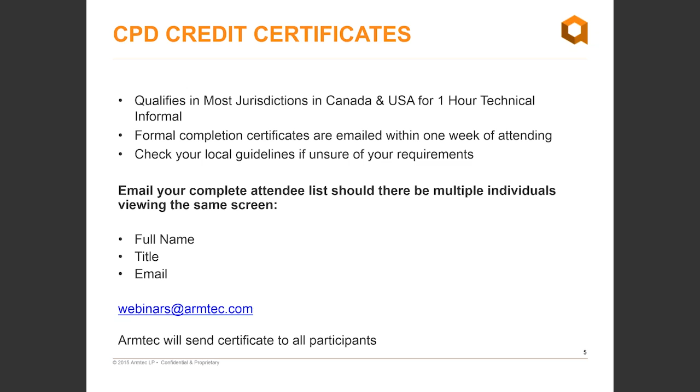I'd like to start off with a brief introduction to Armtec. We are one of Canada's oldest and largest infrastructure companies, supplying solutions ranging from steel and HDPE-based bridge and culvert materials to precast building systems.

With locations across the country, we are well positioned to serve your needs wherever you are. We also have an international sales group to support you with project locations around the world.

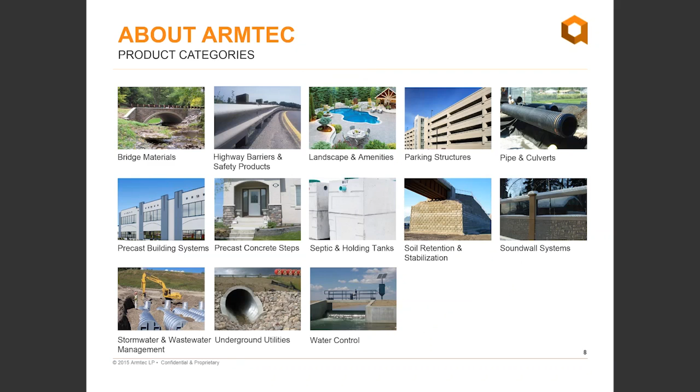As you can see, Armtec offers products in a wide range of categories, including precast products such as building systems, parking structures, and sound wall systems. On the drainage side of the business, we offer pipe and culverts, engineered steel bridge solutions, and, related to today's presentation, stormwater management systems and much more.

We serve numerous sectors from municipal to forestry and mining and energy. More about how we service these sectors can be viewed on our newly revamped website or through discussion with one of our experienced sales representatives.

With our centralized engineering department and regional engineers, Armtec has the exceptional capability to fully support design and challenging engineered project requirements. Our company also has the expertise to take your project through all phases of the design and construction process with the design, build, delivery method.

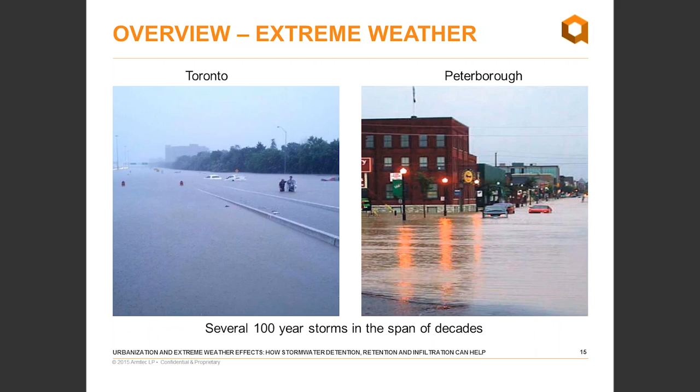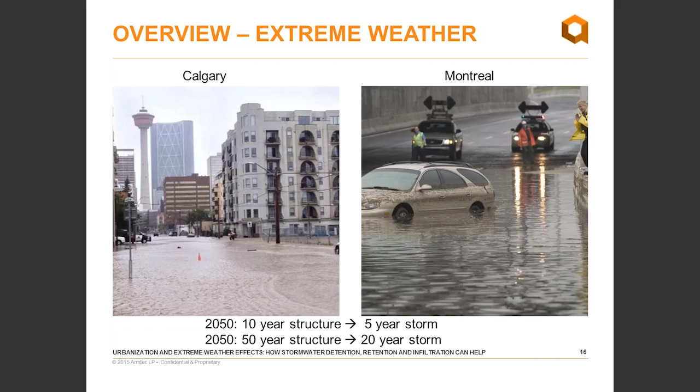As you may already know, we are witnessing an increase in the precipitation intensity and number of severe storms. In some regions of Canada, several 100-year storms have been witnessed within the span of decades. Multiple studies have also shown that by 2050, an actual 10-year drainage structure will only be able to withstand a 5-year storm. A 50-year drainage structure will only be able to handle a 20-year storm.

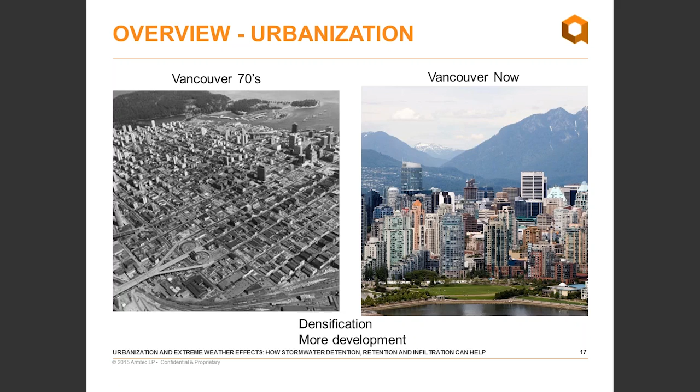At the same time, population needs for new land is also increasing. This is resulting in the densification of already saturated urban areas and expansion into new areas, especially in the suburbs. Impervious surfaces are popping up everywhere, reducing natural soil surfaces and thus eliminating rainwater infiltration and natural ground discharge.

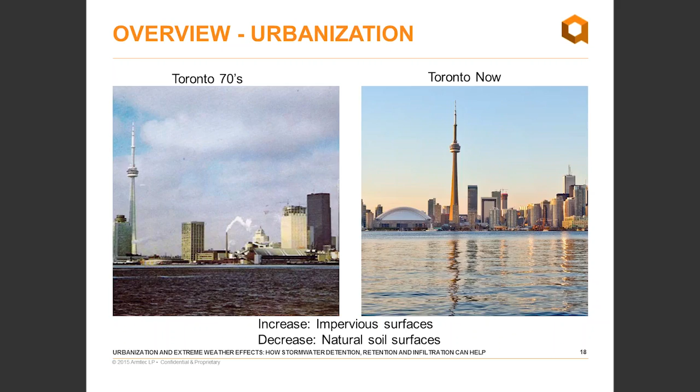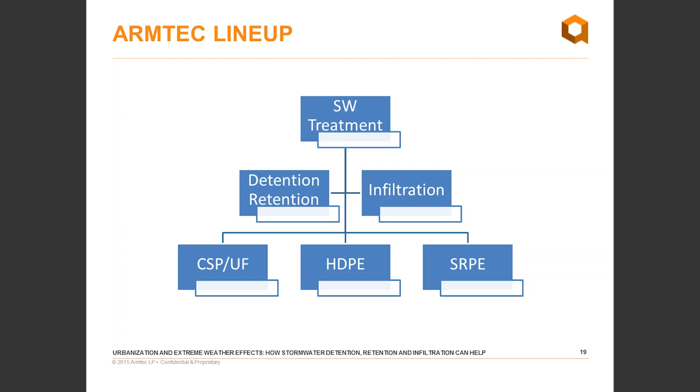At Armtec, we have assembled a line of products to tackle these issues. Similar to a good hockey team, we have identified a line of 3 forwards, another line of 2 defensemen, and a goalie. Our 3 forwards are CSP ULTRA-FLO, HDPE, and SRPE pipes. Our 2 defensemen are detention and retention tanks, and infiltration, and our goalie is the stormwater treatment.

Our first product is the Hel-Cor corrugated steel pipe, which is helically made with a lock seam. We have a wide range of diameters ranging from 150 to 3600 millimeters with different combinations of thicknesses, corrugation, and coatings. We also have custom lengths of 6 and 9 meters, and we can go up to 15 meters on custom-made lengths.

We can also offer different lengths. If you need, for example, 6.5, 7, 9, or 8 meters, we can accommodate that. This pipe is certified and manufactured according to CSA G401.

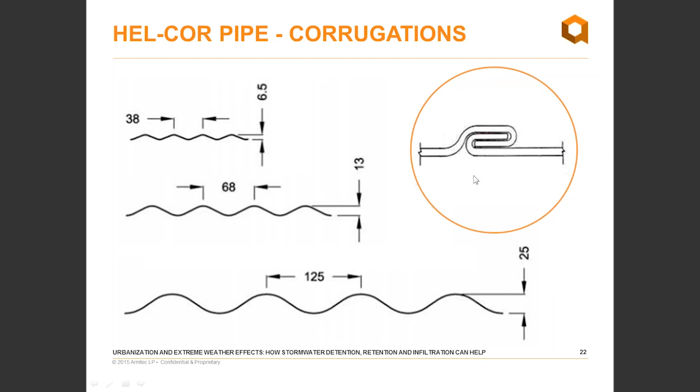We also have the cousin for the Hel-Cor pipe, which is the ULTRA-FLO. The difference between the ULTRA-FLO and the Hel-Cor is the Manning coefficient. We have practically a smooth interior for the ULTRA-FLO with a Manning of 0.013.

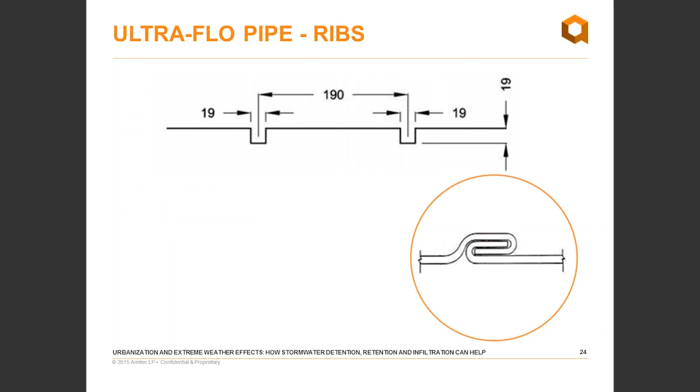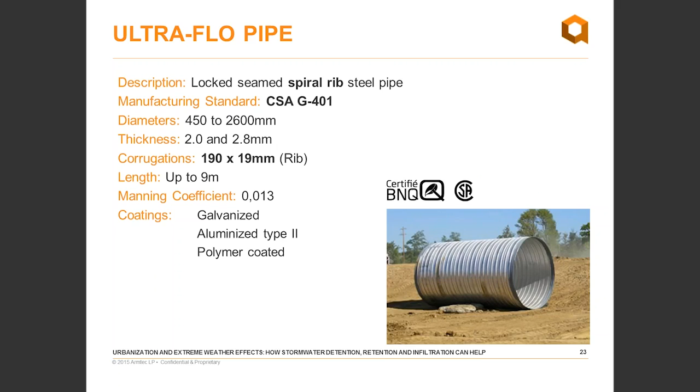It has the same coating. You can offer them with the same coating as the regular Hel-Cor pipe. The structural part of the pipe is handled by a rib of 19 millimeters by 19 millimeters that you can see here, spanning every 190 millimeters. We have a variety of diameters going up to 2600 and 2 different thicknesses, 2.0 and 2.8 millimeters.

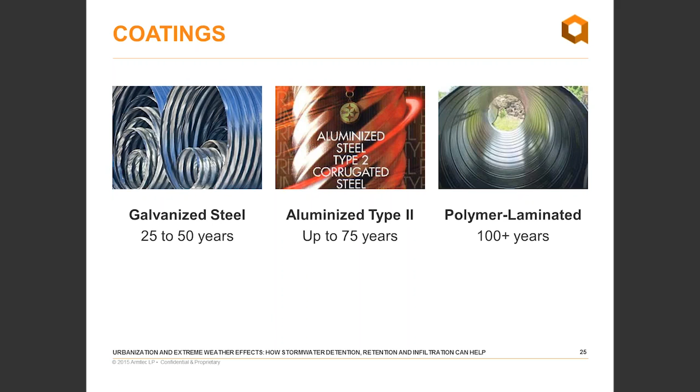As seen before, we have 3 different coatings for those 2 types of pipes. We have galvanized steel with an estimated service life between 25 and 50 years. We have aluminized type 2 steel which can offer a service life up to 75 years, and a polymer-laminated steel which can go up to 100 years and more. Our polymer-laminated product is also known commercially as TRENCHCOAT, combining the strength of steel with the durability of plastic.

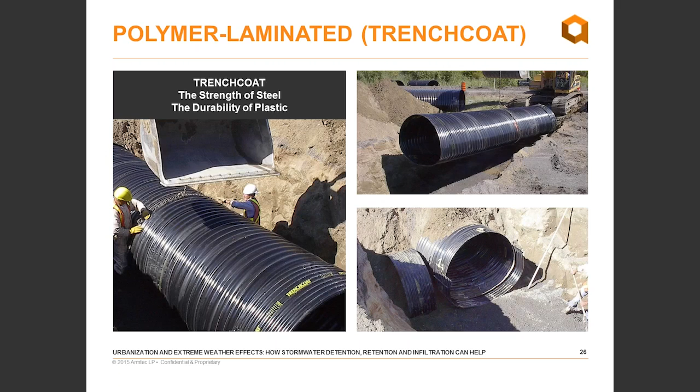Aluminized will perform best between 5 and 9. Polymer laminated between 3 and 12. Resistivity-wise, galvanized is good between 2,000 and 8,000. Aluminized is good at 1,500 and more. Resistivity is not an issue for the polymer.

Hardness-wise, any concentration above 75 ppm is good for galvanized. It's not a factor for aluminized. It's not a factor for polymer. The hardness effect is very important for the galvanized steel.

In some parts of the country, we have installed galvanized pipes which have more than 75 years of actual service, and they are still in good condition.

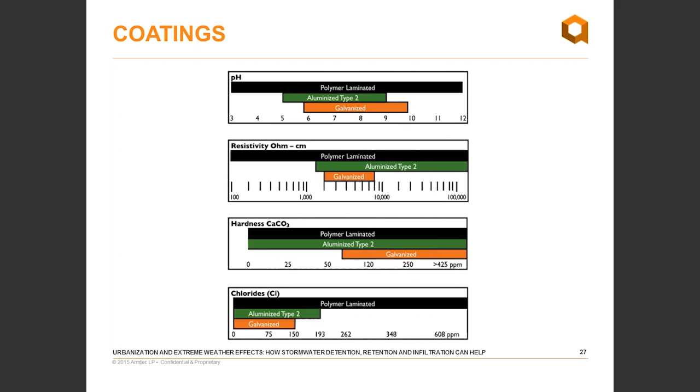Enemy number one of galvanized and aluminized steel is chloride, which is the salt we use on the road. Any concentration above 150 ppm for galvanized or 190 for aluminized is very bad. It's not a factor for polymer laminated.

With those two kinds of products, Hel-Cor and ULTRA-FLO, we offer a wide range of fittings. Could be Ys, could be Ts, could be inlets, outlets, we can offer risers, we can offer adapters, any kind of adapter, anything you can imagine, anything you can draw, we're able to manufacture. All of this is done at our factories located across the country.

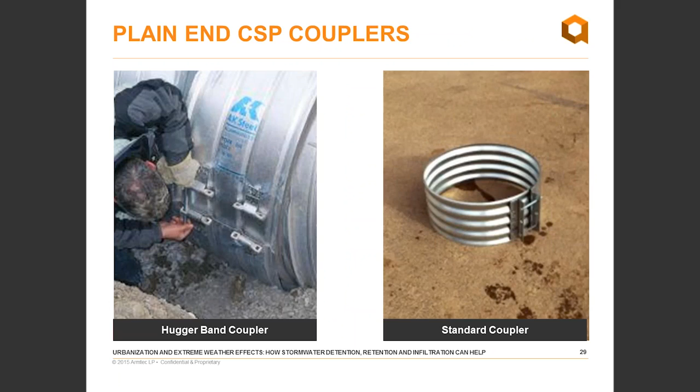For those two pipes, we also offer two kinds of couplers. The first one is a soil-tight kind of coupler, which is a standard coupler. And for a watertight application, we use the Hugger Band.

Our second product is the high-density polyethylene corrugated pipe, which is basically made from virgin and recycled resin. We add to it some carbon black, minimum 2%, to protect against ultraviolet radiation.

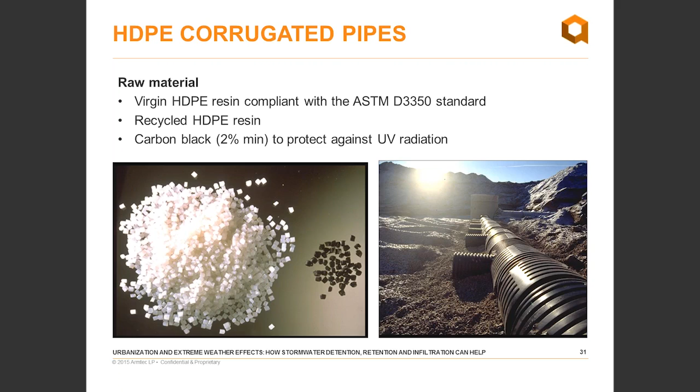The BOSS 2000 range of products is a pipe which has a smooth interior with a corrugated outside wall. It's made in diameters up to 900 millimeters, with a standard length of 6 meters. We also offer different custom lengths that can go up to 15 meters.

We offer two ranges of stiffnesses, which basically gives the structural integrity of the pipe. We have 210 and 320 kPa. We offer them both in solid or perforated. For the perforated one, we can offer an additional filter or geotextile sock, any kind of geotextile based on site conditions the pipe can be fitted with.

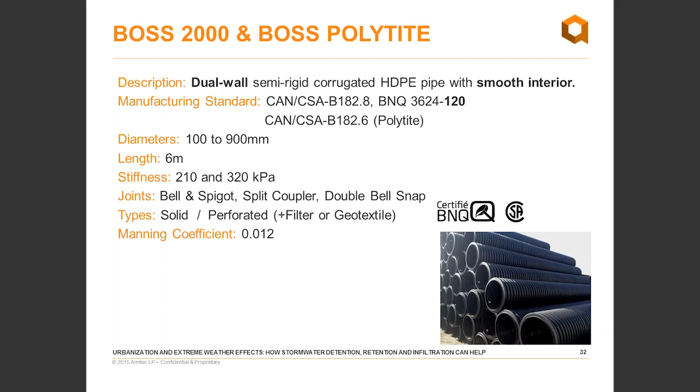This is a smooth interior pipe, so the Manning coefficient is very low, up to 0.012.

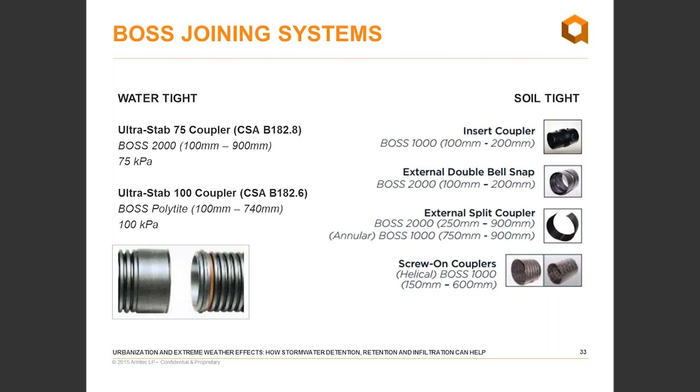We have a wide variety of joining systems for the BOSS 2000. We have soil-tight, different kinds of couplers, and we have watertight ones with bell and gasket. We also offer a manholes coupler for special applications.

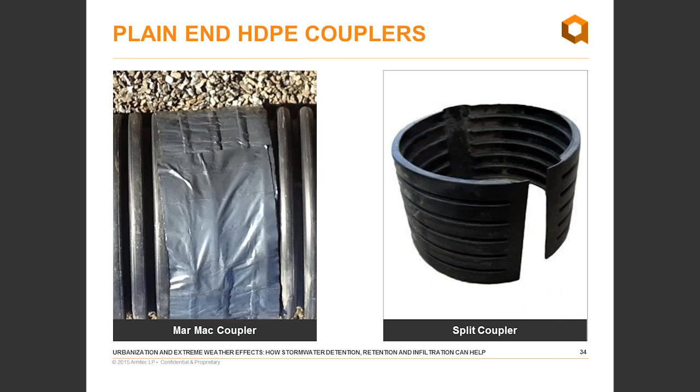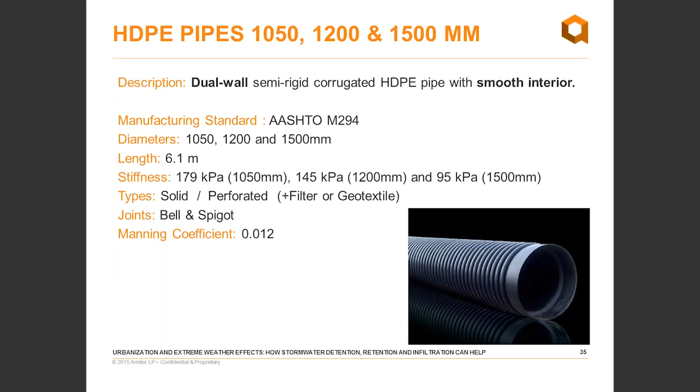The second range of HDPE pipe for higher diameters is similar to the other one, except for the stiffness. The stiffness will vary and go down with the pipe diameter. So basically, a 1050 will be 179 kPa, and a 1500 will be 95 kPa. It's a standard length of 6.1 meters, and the joint is a bell and spigot, the same manning as previously talked about.

As with the CSP pipe, we offer a wide range of fittings. They can range from elbows, T's, Y's, reducers, any kind of fitting you can imagine, manhole adapters, couplings, risers, whatever you can think of, we can have it.

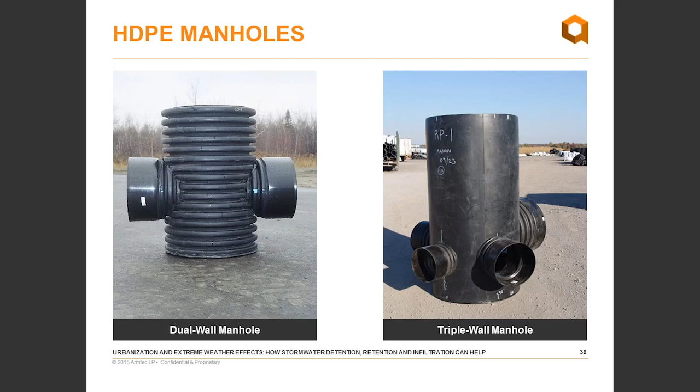With the HDPE, we can also offer dual wall manholes and triple wall manholes. The difference with the triple wall manhole is we add a third layer to make it a smooth wall exterior for the manholes. As you can see, we can adapt, we can add multiple inlets and outlets with different diameters to those manholes.

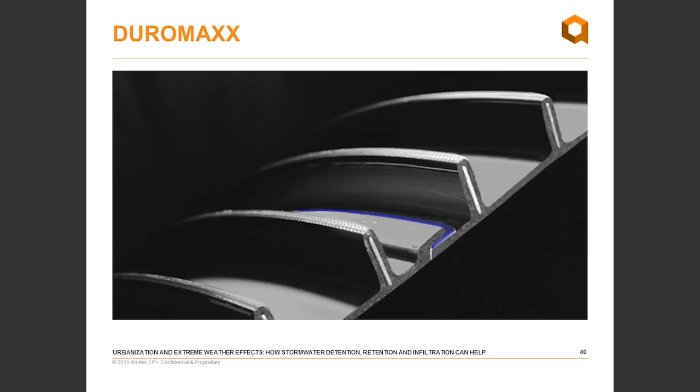This kind of steel reinforcement will enable the DUROMAXX pipe to have bigger diameters, so we can go up to 3,000 millimeters, and it will also increase the strength of the pipe, so it will withstand higher covers and higher live loading. We offer them with typical lengths of 4.3 and 7.3 meters as a standard, and we can go up to 15 meter long custom ones.

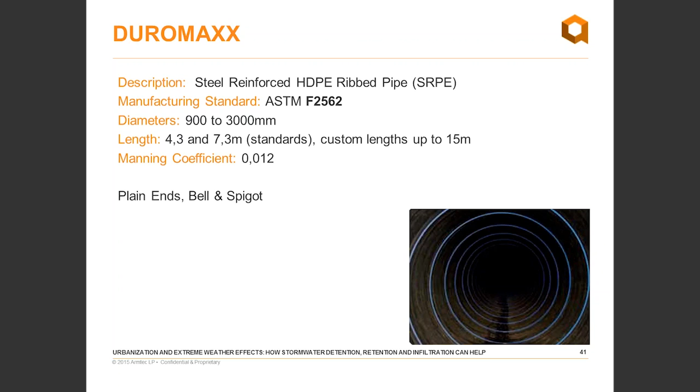We offer different joining systems depending on the site conditions. We can offer soil tight culvert joint. We can offer a non-reinforced bell and spigot, which gives us a water tightness up to 3 psi. If you need more water tightness up to 15 psi, we can add a reinforcement to the bell. Additional water tightness up to 35 psi could be achieved with ELECTROFUSION.

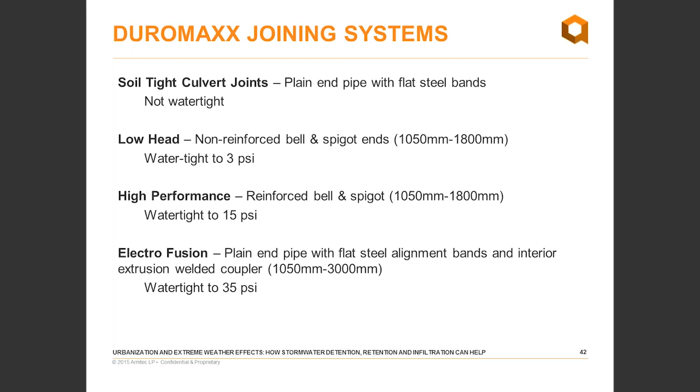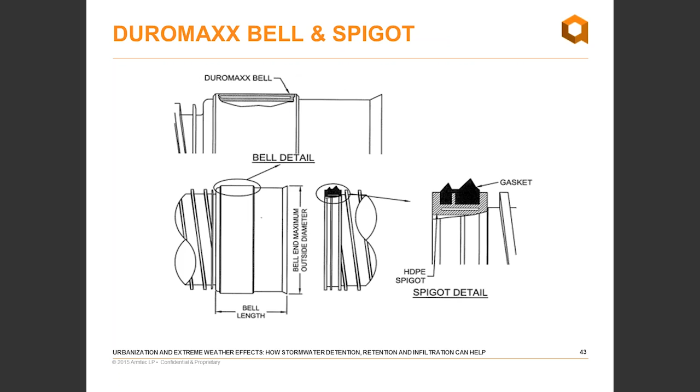This is an example of the reinforced bell. As you can see, there is an encapsulated steel plate inside the bell, which will give it additional rigidity and increase its water tightness compared to a regular non-reinforced HDPE bell.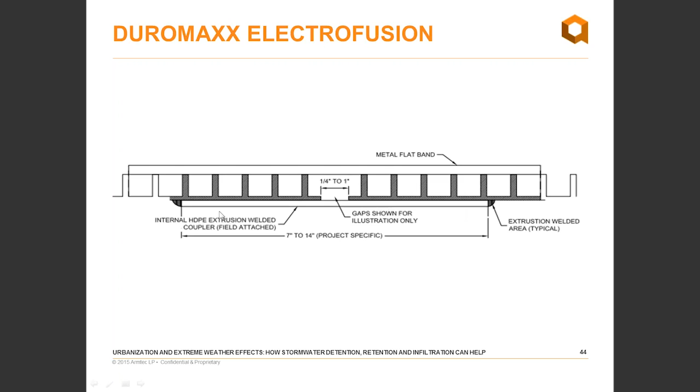For additional water tightness, this is the detail for the ELECTROFUSION. As you can see, there is an outside metal flat band to help during the installation. All the water tightness is achieved through the ELECTROFUSION from the inside of the pipe, made as soon as the pipe has been installed.

What we will do is mimic the actual conditions before development of the land. So basically, the water will go inside and then dissipate inside the land and go down as it would usually do without the new development.

Some design and construction considerations: usually, hydrology and hydraulics are handled by the consultant. He will get back to us with his storage requirement, and we will ask him about the footprint he has on site. We will handle the structural design, propose a layout, and give him guidelines on installation, maintenance, inspection, and cleaning of each detention or retention tank.

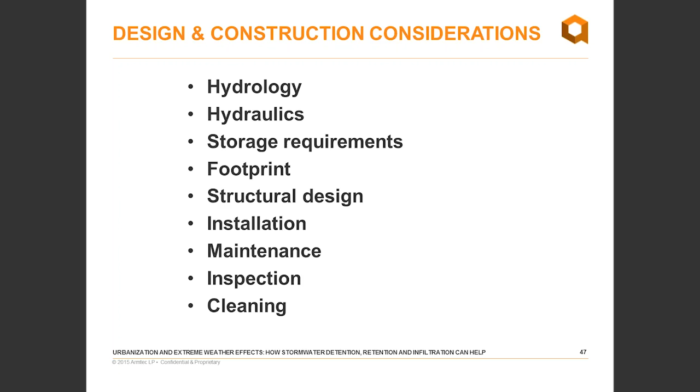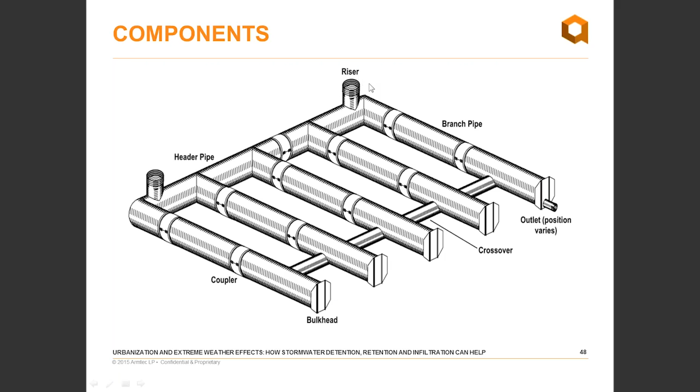Basic components of a typical retention or detention tank: we have the branch pipe, which is made by a regular pipe, and the header pipe, which assumes the flow inside those branch pipes. We also have bulkheads, outlets, couplers, and crossovers to connect the different branches. Finally, we have risers, which will enable us to do maintenance, cleaning, or inspection.

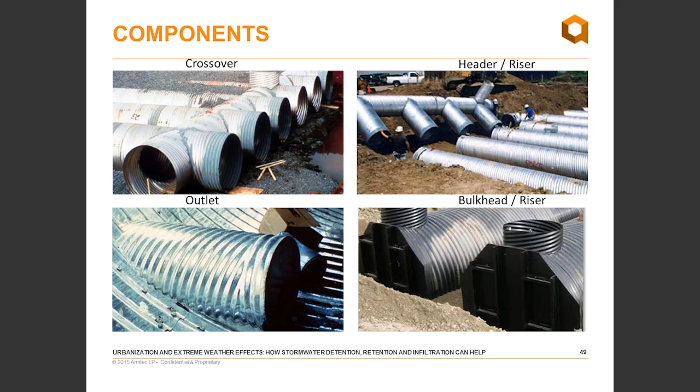This is some examples of those components. We have here the headers with integrated riser. We have a bulkhead with integrated riser, a crossover, and the outlet. The outlet can be put anywhere. We have the possibility also to include inlets or outlets anywhere inside that system.

One of the advantages of the detention-retention tank is versatility. Depending on the footprint you have on site, we are able to make any kind of layout to fit what you have on site. So this is one example.

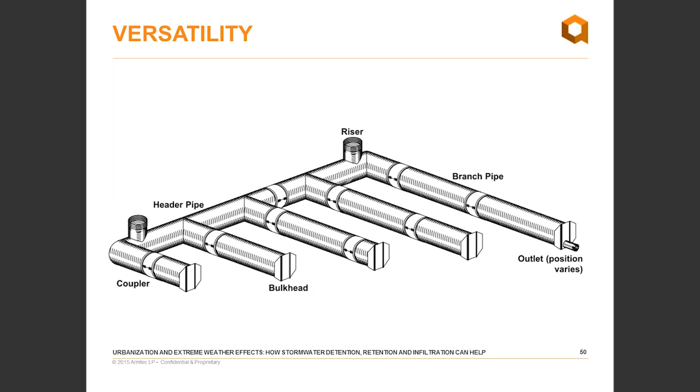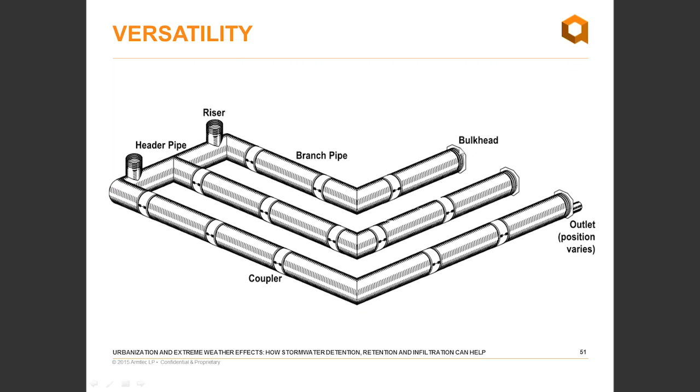We can also have different kinds of applications. We can integrate elbows inside our detention tanks. As you can see, we still have all the regular components: bulkhead, risers, headers, outlets. This is a different combination also.

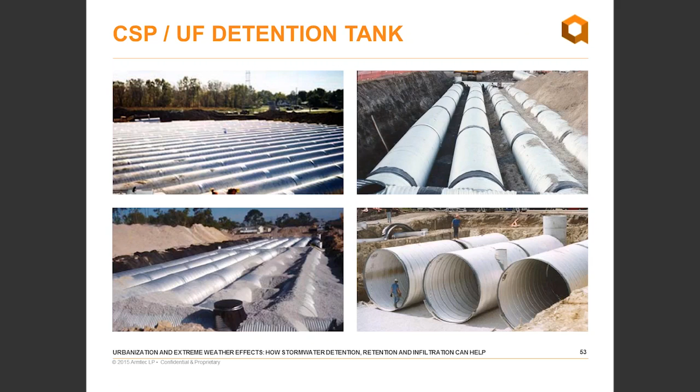Here are some examples of CSP Ultra Flo detention tank. As you can see, we can offer with CSP a wide range of diameters, small and big ones. You can see here the risers. The number of risers actually depends on the system; we recommend at least one riser per system, but we can make as many as an engineer wants on each system.

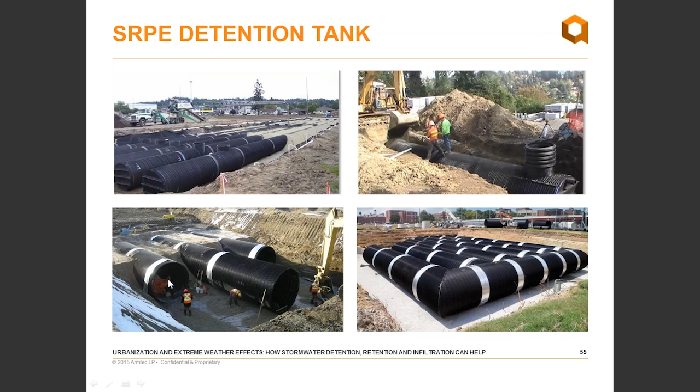Our last example of detention tank is the SRPE, which is the DUROMAXX. DUROMAXX can not only be used for stormwater, but also for non-stormwater applications, for example sanitary sewers or combined sewers. Here at the bottom left side is a combined sewer example. You can see the metal band on the outside part of the pipe. After the system has been installed, a team entered and did the electrofusion inside that system.

We at Armtec offer a design tool. This design tool is very simple; it's an Excel sheet where you add the wanted volume you need to detain. You add some basic information about the dimensions or the elevation. You also choose the pipe size, and you choose if you want it as a detention or a retention system.

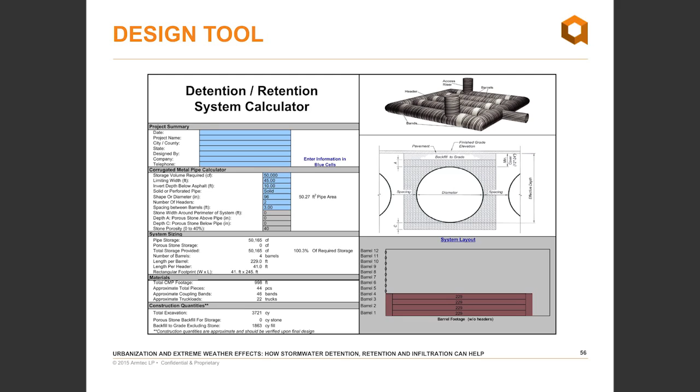If it is a retention system, you can add some data about the distance between the pipes, the height of washed stone to use, and the porosity of the washed stone. The Excel sheet will give you back the total volume the pipe is going to hold, the total volume the wash stone will hold, a preview of the layout, the quantity of all the branches, couplers, headers, risers, total quantities of trucks needed, and also an approximate idea of the total excavation and total wash stone quantities needed for that site.

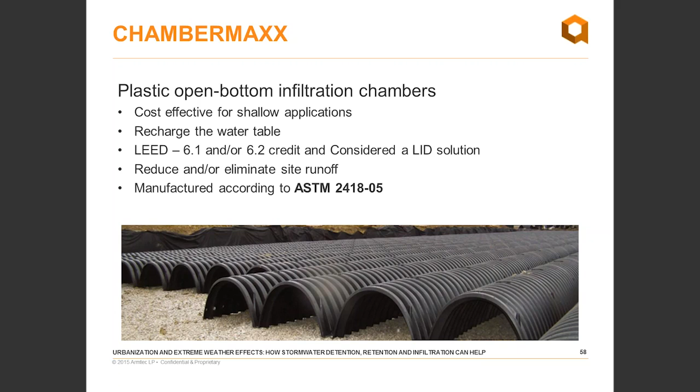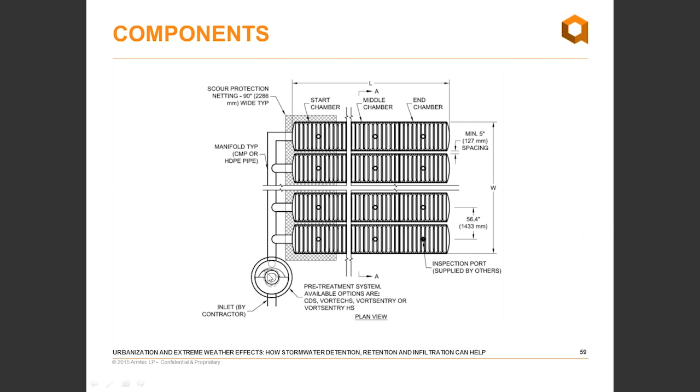Basic components of CHAMBERMAXX include a start chamber, a middle chamber, and an end chamber. We also have an inspection port, a scour netting, and a header type or manifold. We recommend also having a pre-treatment system before the CHAMBERMAXX. This is a 3D view of the same components. One advantage of CHAMBERMAXX is that the end chamber has an integrated end wall. This is the inspection port, this is the header manifold, and this is the pre-treatment system.

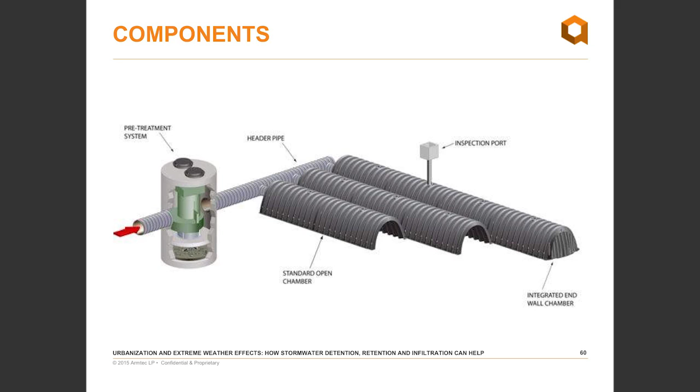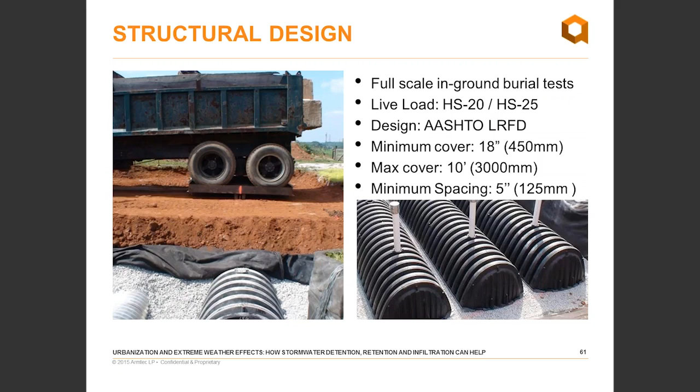The CHAMBERMAXX has withstood a full scale in-ground burial test with height of cover ranging from 450 millimeters to 3,000 millimeters and live loading of HS20, HS25. We recommend a minimum spacing of 125 millimeters. Standard dimension of a regular CHAMBERMAXX is a span of 1,300 millimeters and a rise of 770, with an average length of 2,100 millimeters. Including the surrounding stone, a CHAMBERMAXX is able to take approximately 1 cubic meter per linear meter of CHAMBERMAXX.

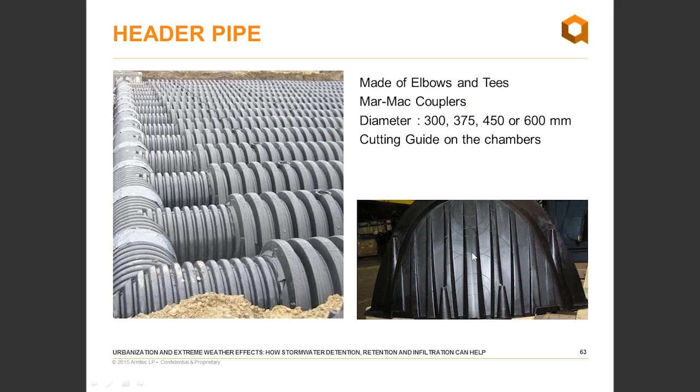This is a detail of the header pipe, usually made of elbows and T's and connected to each other with the Mar-Mac type of couplers. We have a wide variety of diameters available, 300 to 600 millimeters, and usually you would connect it to the CHAMBERMAXX using the cutting guide, as you can see here on the wall end of the chamber.

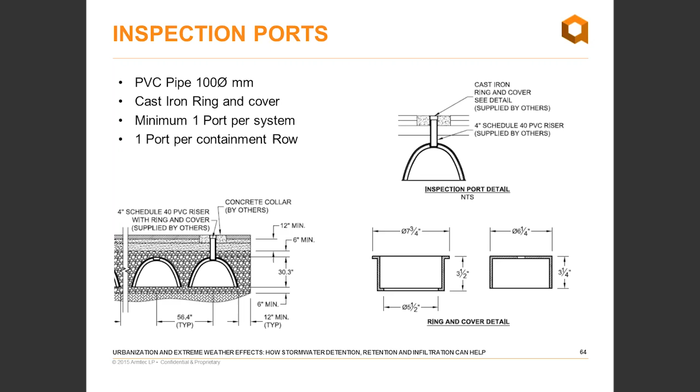We also have the inspection port. The inspection port is basically a 100 millimeter PVC pipe with a cast iron ring and cover. We usually recommend at least one port per system and one port per containment row. We also recommend pre-treating the water before it enters the system to help reduce the quantity of sediment, increase the efficiency of the system, and reduce the maintenance cycle needed for the CHAMBERMAXX.

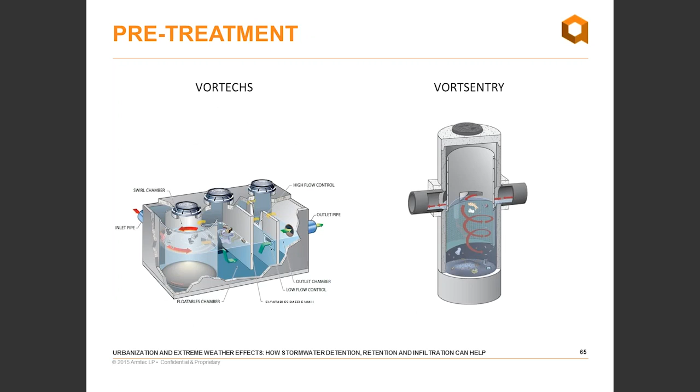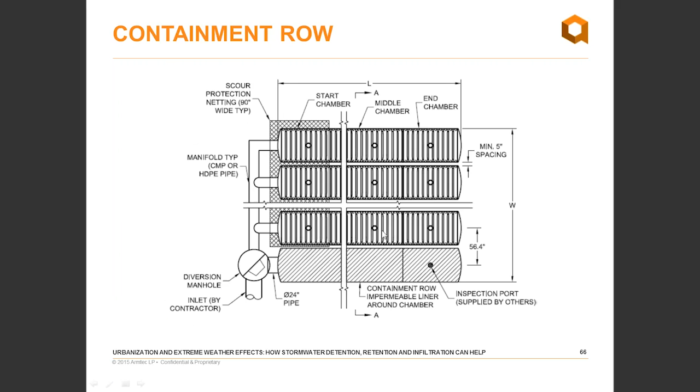Instead of using a pre-treatment system, we can also use a containment row. Basically, the containment row is a regular CHAMBERMAXX row wrapped all over with an impermeable membrane. When we want to do maintenance on a containment row, all the sediments will be trapped inside the chamber, and we have a back kind of washout that brings the sediment from the back end of the unit to the inlet manhole at the beginning of the system.

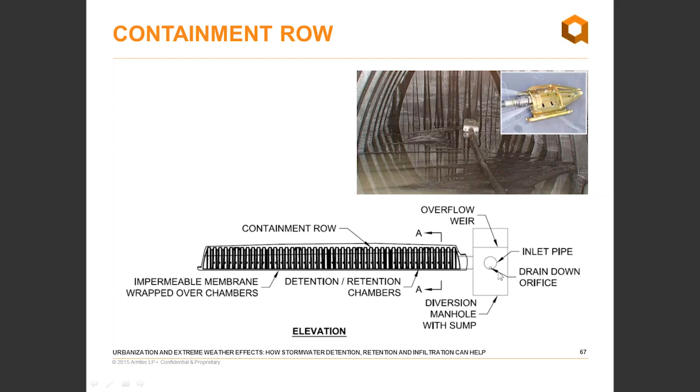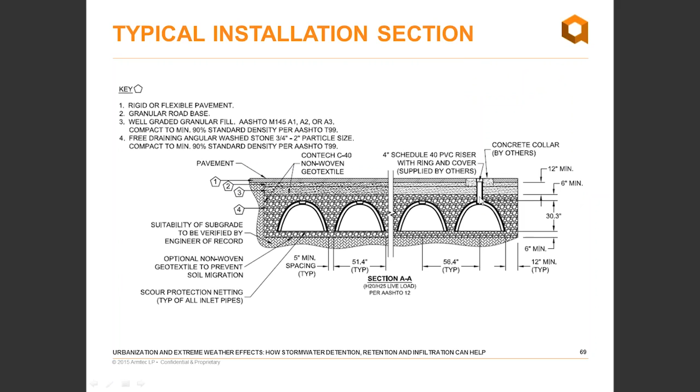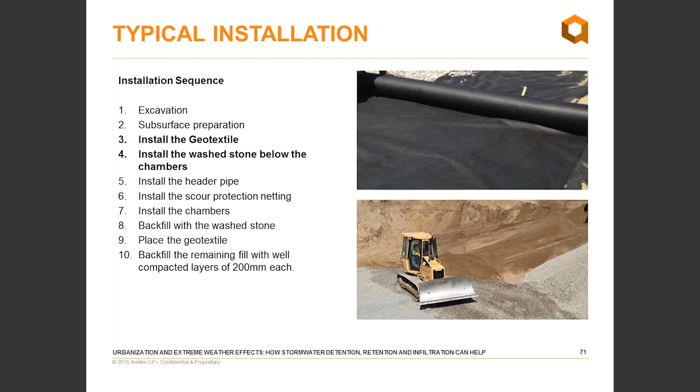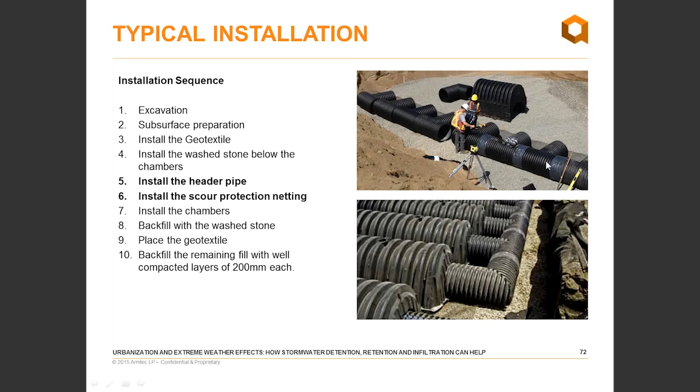The sequence of installation: we start by excavating until the required elevation, then we prepare the subsurface. We lay over the first layer of geotextile between the existing soil and before adding the washed stone on it, the first layer of washed stone underneath the CHAMBERMAXX. We install the scour protection netting and the header pipe, then we connect them to the chambers and install the remaining chambers.

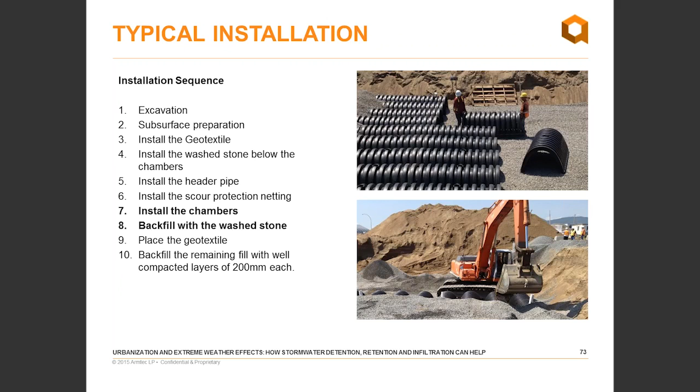As soon as we finish, we backfill with the washed stone to the required level. We place the geotextile to protect the washed stone, and then we place the remaining backfill as requested until the pavement level.

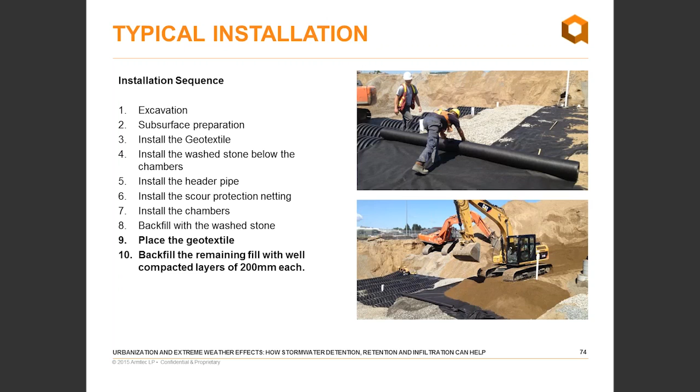Manufacturing-wise, it's a very simple process. The CHAMBERMAXX is an injection molded polypropylene product with superior resin, structurally and in quality. One of its advantages is the integrated end walls that will prevent the loss of soil from the top, if a non-integrated wall would break down from the regular end unit.

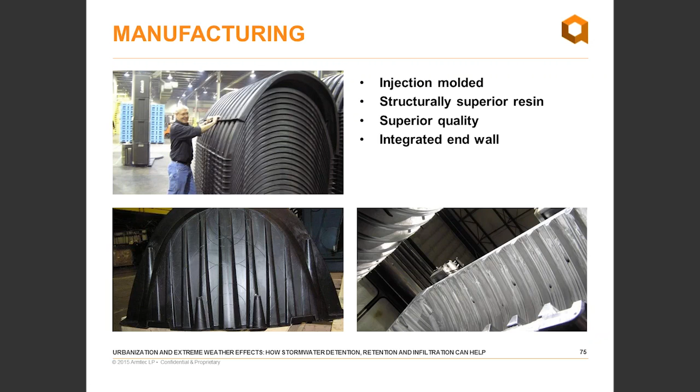As per the detention system, we have a design tool which is available as an Excel sheet. It's also very similar for the retention system. Basically, you input the required volume, the depth of the invert, the limiting width.

If you want to use the porous stone, you input the thicknesses or depths below and above the system, and the density or porosity of the stone.

The system will automatically generate a preview of the layout. It will also give you the number of chambers, the total volume, the volume from the chambers itself and the volume from the porous stone, as well as an approximate rectangular footprint.

We will also have a detail of the number of middle units, start units, end units, the manifold, the header unit. We will also give you a quantity of the scour netting, the geotextile used, the number of trucks needed, as well as the total excavation volume, stone backfill volume, and the remaining backfill to grade.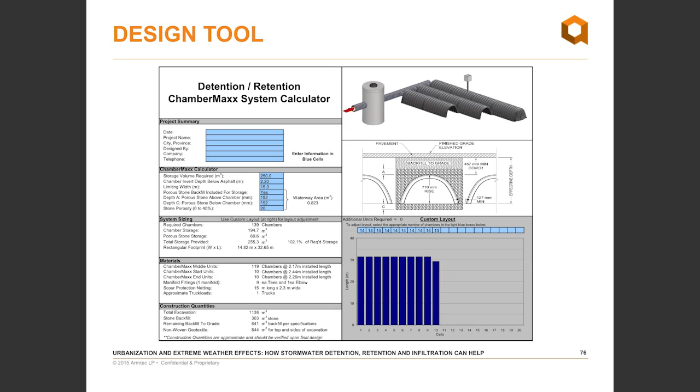Hello, everyone. Today I'm going to talk about our stormwater treatment unit, VORTECHS, which is Armtec's flagship stormwater treatment offering. It's a shallow profile, high flow, hydrodynamic separator. But before I start my presentation, I would like to review the reasoning behind the soaring demand for underground water treatment and management, and the urgency for such solutions within municipal and private projects.

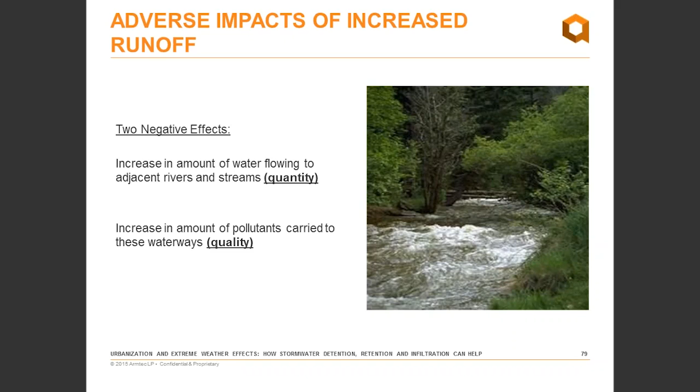And from the qualitative point of view, the negative problem is obviously the pollutants that enter the waterways. Untreated stormwater contains chemicals, heavy metals, and many other harmful particles. So, VORTECHS is Armtec's flagship stormwater treatment offering. It's a shallow profile, high flow hydrodynamic separator, comprised of a rectangular vault with an inlet on one side and an outlet on the extreme end, a swirl chamber, and two baffle walls.

The first part is the swirl chamber, which is made of marine-grade aluminum. This means the chamber is highly resistant to salt water, which significantly increases the longevity of the product.

The other parts are a floatable chamber and floatables baffle wall, and downstream to these is the second baffle wall, where it houses two devices, low and high flow controls. As I mentioned, the VORTECHS has a shallow profile, which is a very unique feature of this product.

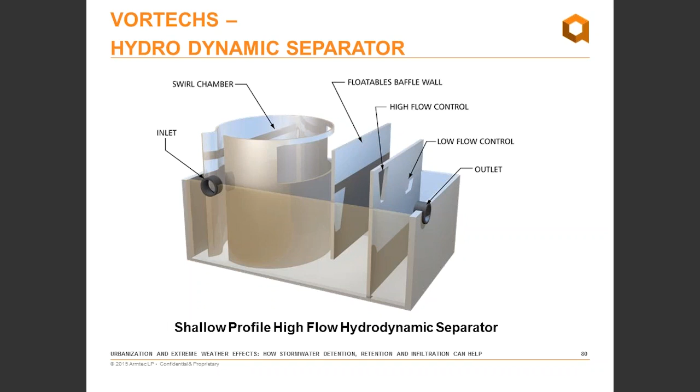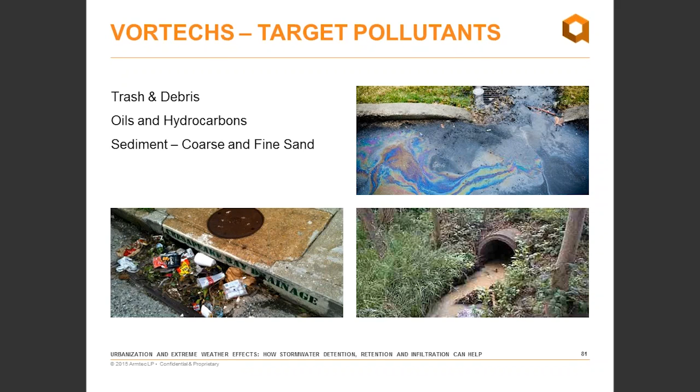So VORTECHS is able to collect pretty much all the pollutants that we are concerned about. As shown on the pictures on the slide, it can collect trash and debris, as you can see in the lower left-hand corner picture, oils and hydrocarbons shown in the upper right-hand corner, and sediments, coarse and fine sand. As you can see in the picture, the water is very murky and dark, so apparently the system is not doing a great job because the sand is present in the stream, and that's why it's not clean water.

So how does it work? I'm going to talk about the mode of operation here, and I'm going to show an animation at the end of my presentation. When the stormwater gets into the swirl chamber, the sediments, coarse and fine sand, will be collected at the bottom of the chamber.

After that, water will enter the floatable chamber and will face the first baffle wall, where floatable oil and grease are trapped at the surface against the wall. These, along with the sediments collected in the swirl chamber, can be cleaned and collected at a later time.

In the next stage, water will face the second baffle wall with two flow controls, as mentioned before. The low flow control regulates flows within the vault during low intensity storms, and the high flow control has been designed for the same functionality, only for medium and high intensity storm events.

One unique feature is that the low flow control device functions by backing up water at the beginning of a storm event, and this instantly submerges the inlet pipe and increases the laminar condition within the swirl chamber, allowing the particles to settle out of the solution.

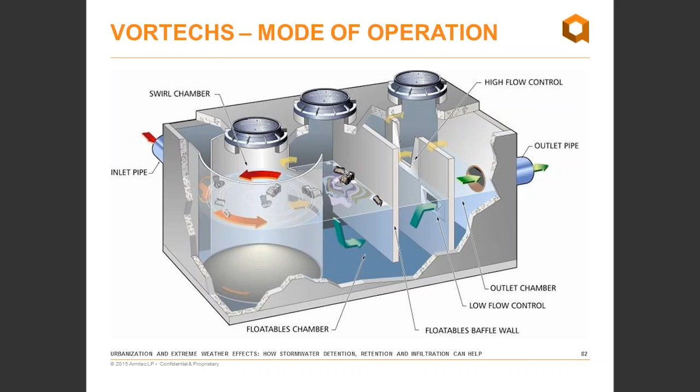Another unique feature of Vortechs is having 3 manhole accesses, which allows for unobstructed inspection of the unit. With Vortechs, we can have a maximum of 2 inlets, but we can have as many outlets as required, as long as the wall can accommodate them.

The benefits of Vortechs: first of all, it can achieve 80% removal efficiency of 50 micron total suspended solids, TSS, particle size. It's very important to mention here, if we are working on a project, we have to consider the particle size in order to be able to compare apples to apples. I have seen, from experience, many cases where they mention 80% removal but the particle size is not mentioned. This should be considered very carefully.

The other benefit is online and offline configuration, and this can be precast or cast in place, which I'll talk about a little bit later. There's also the shallow profile and unique horizontal design. Most other units available in the market go up to 20 feet deep, so this creates a competitive advantage for Vortechs, avoiding conflicts with bedrock, groundwater, and underground utilities.

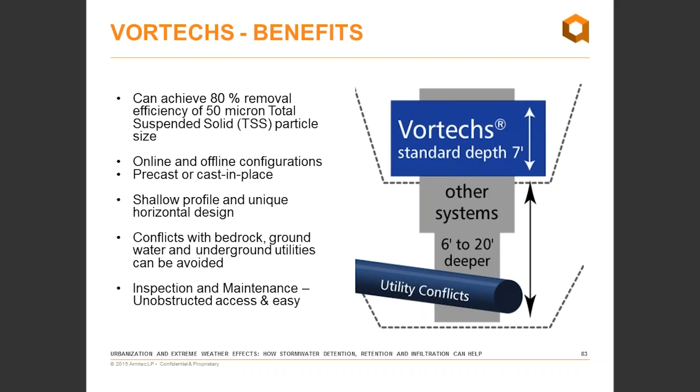Also, as I showed, there are 3 manholes for inspection, so inspection and maintenance can be done with unobstructed access, very, very easily.

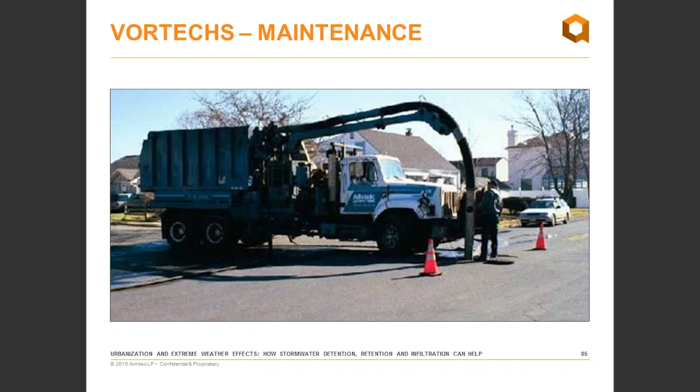As mentioned, maintenance is very easy and accessible for Vortechs. We recommend maintaining and cleaning the Vortechs unit once a year. The only point I'd like to mention is that for cleaning the Vortechs unit, you only need to open the manhole on top of the swirl chamber, because when the vacuum sucks the water and sediments from the swirl chamber, other debris from the floatable chamber will move back into the swirl chamber through the cutoff wall.

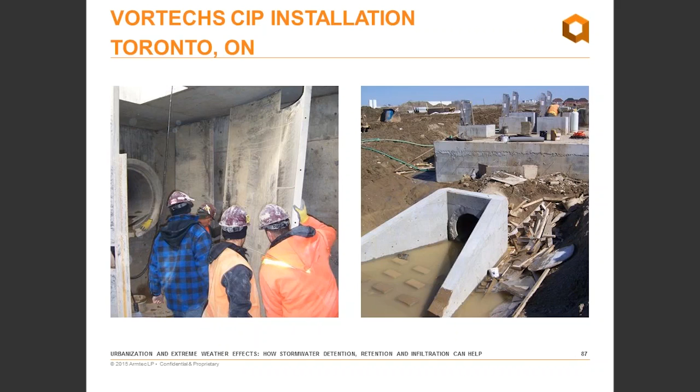So I'm going to show an animation here showing how it works. This is the dry weather condition. Now I'll move to a low intensity storm. As you can see, the low flow device is getting submerged along with the inlet pipe and the sediments, creating a calm situation in the swirl chamber for the highest efficiency of sediment settling.

In a medium intensity storm event, the water increases and flows to the high flow device, and floatables get trapped at the baffle wall, the floatable baffle wall here. In a high intensity storm, as you can see, we reach the maximum capacity of the Vortechs unit.

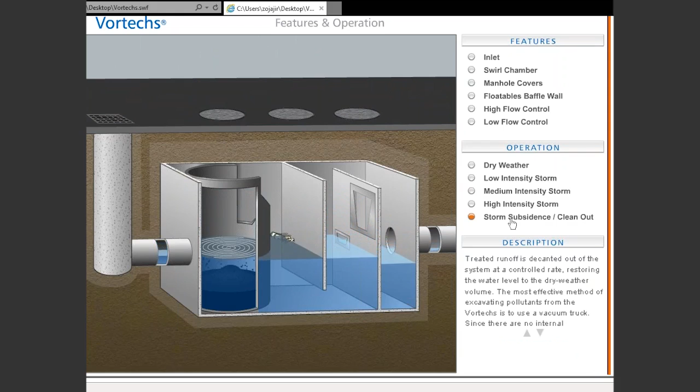And this part will show the clean out. As I mentioned, only one manhole needs to be opened, the one on top of the swirl chamber, and it cleans the whole unit.

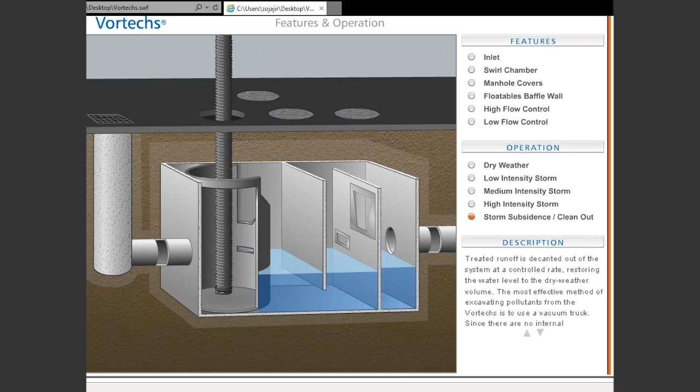I'm going to pass it off to Janine again to continue with the presentation.

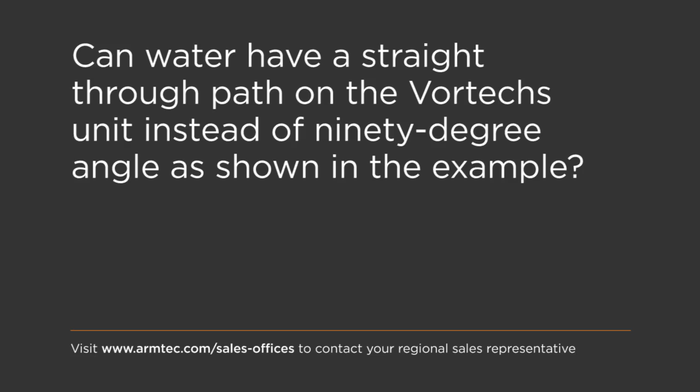Are there any typical guidelines for unit cost range for retention and detention storage per cubic meter, supply and install? Usually it depends on the different combinations we have. What we've seen is that as soon as you increase the diameter of the detention system, the need for excavation decreases, you have a lower footprint, and the overall price of the system will be lower than with smaller diameter pipes. But really it's going to depend on each site, and we don't have actual numbers.

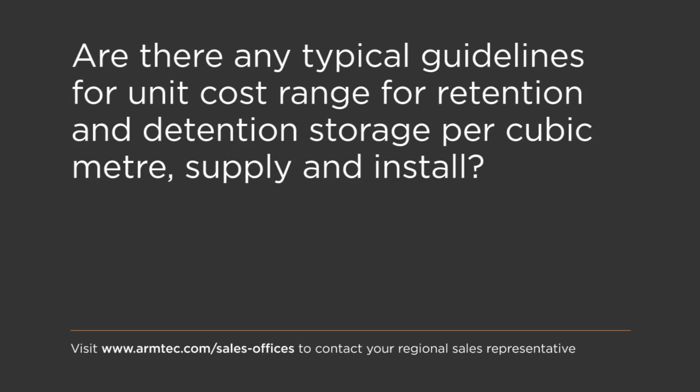That's great, thanks Tony. Can you please explain the online and offline configurations for the stormwater treatment unit? Sure. There is no internal bypass for the Vortechs. So if there's an existing subdivision and we install the Vortechs, we can have a bypass line in case of a stormwater event that surpasses the capacity of the Vortechs. So it means it can be done offline and online as well.

Excellent, thank you. Is DUROMAXX CSA and/or AASHTO certified? DUROMAXX is not yet certified, but it complies with those 2 standards.